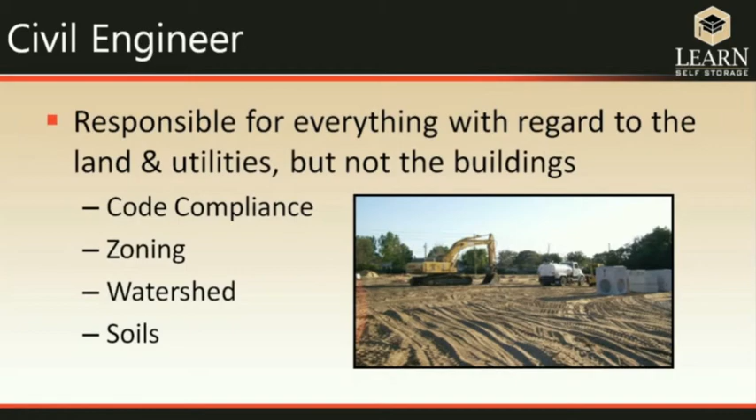The responsibilities of the civil engineer are basically for everything with regard to the land and the utilities, but not the buildings. Once the buildings start, the civil engineer's work is finished. But they are very important in finding out what all of the codes are, what the zoning is, if there are any watershed problems, and what soil problems could be anticipated.

The architect is the person who has the ultimate design responsibility for all disciplines. All of the other people working on the project report to the architect. In addition to coordinating everything, they also draw the site plans, the architecturals, and provide the renderings.

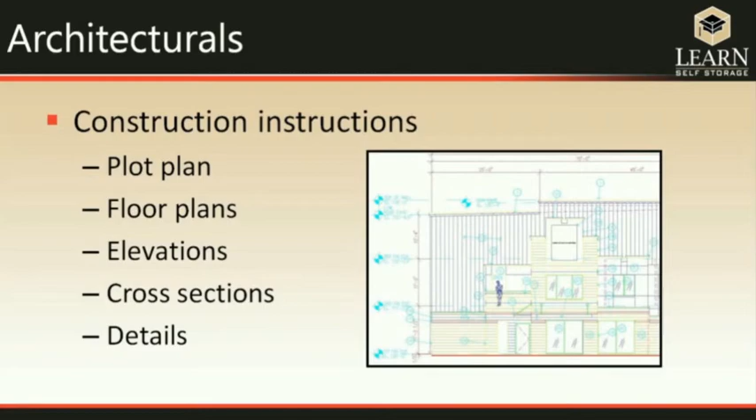The architecturals are actually the instructions for construction, and all of the other disciplines go off the architecturals in designing their own individual portions. This is a cross-section, and this is actually an elevation from one of the design drawings. The plot plans, the floor plans, the elevations, the cross-sections, and the details are the basic footprint for the whole project.

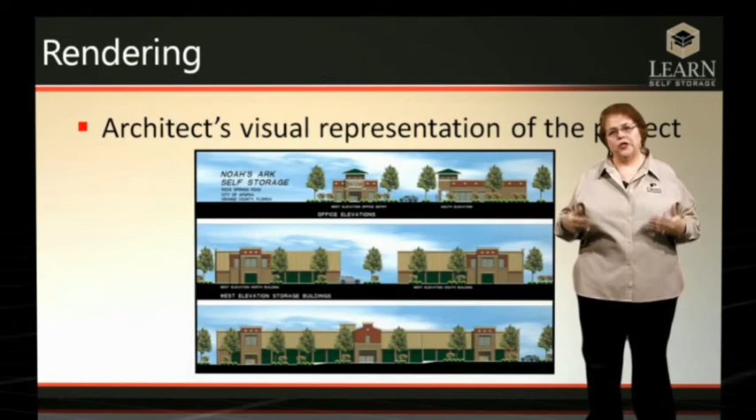This rendering is the architect's visual representation of the project, and this is very important when you are going to a zoning committee or neighborhoods so that you can tell them that the project you are anticipating building in their neighborhood is something that they can be proud of. This is something that the architect provides for you based on the plan that she has designed.

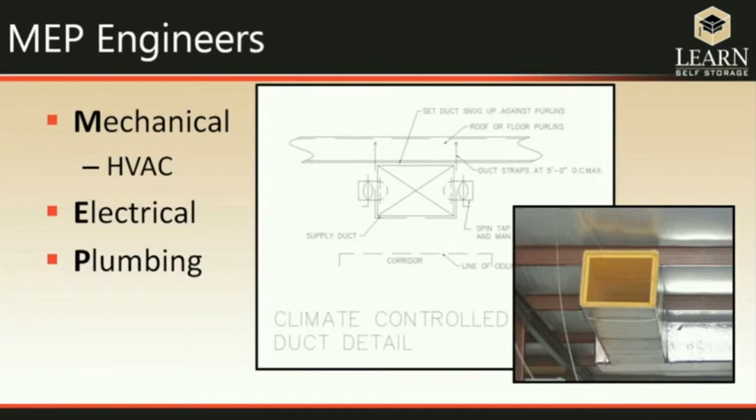The MEP engineers are the mechanical, electrical, and plumbing engineers. Mechanical is your air conditioning, and they provide all of the details for their particular disciplines so that all of the construction can be coordinated. This is a simple drawing of an HVAC duct. As you can see, the mechanical engineer would have designed how the duct is to fit in the building, and then that's the actual application of the design.

The interfaces that have to be taken into consideration in self-storage with HVAC considerations are the space for air handling equipment. Where it's going to be placed has to be part of your metal building design and engineering, along with the units themselves and the ducting. You have to make sure that there's plenty of airflow above the hallways and above the partitions, and how much airflow is needed is dependent upon the HVAC design.

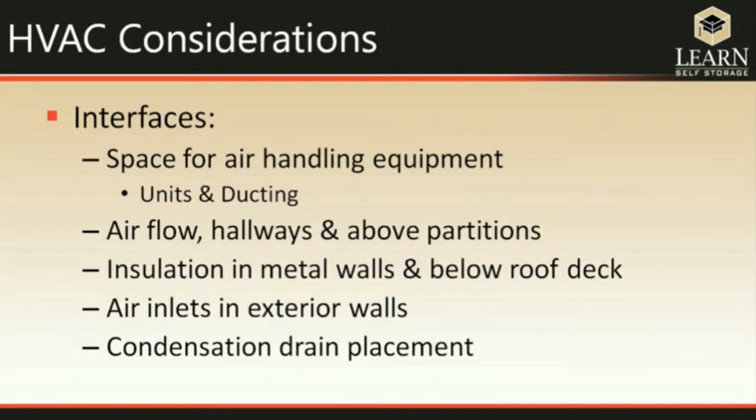The insulation type in walls and below the roof deck is part of the HVAC consideration, and you're going to have air inlets in the exterior walls, and there are going to be condensate drains. These things aren't part of the actual metal building, but you have to be aware of them and take them into consideration when you're actually designing your building.

Electrical items have to be taken into consideration as well. The exterior fixtures, for instance, can't be in the same spot where you're planning to have a downspout placement.

Downspout placements are set at specific intervals in order to handle the water coming off the roof, but we have to coordinate with the electrical to make sure that their fixtures and our downspouts aren't in the same place. There are also considerations for soffit heights and lighting fixtures in the hallways, equipment rooms for electrical or panels, and conduit placement. All of these things from the electrical portion of the drawings can have an effect on the metal building drawings as well.

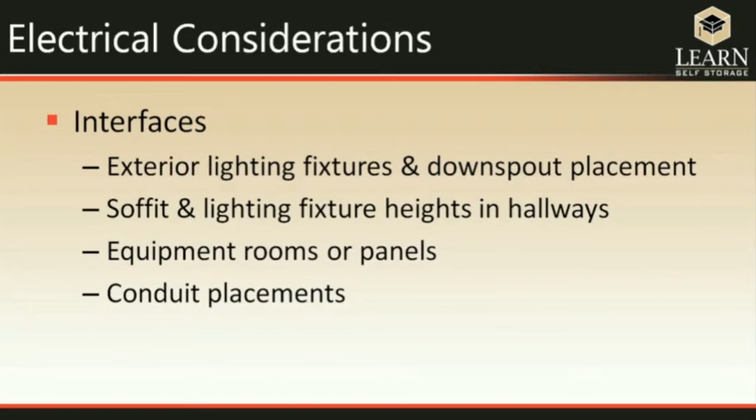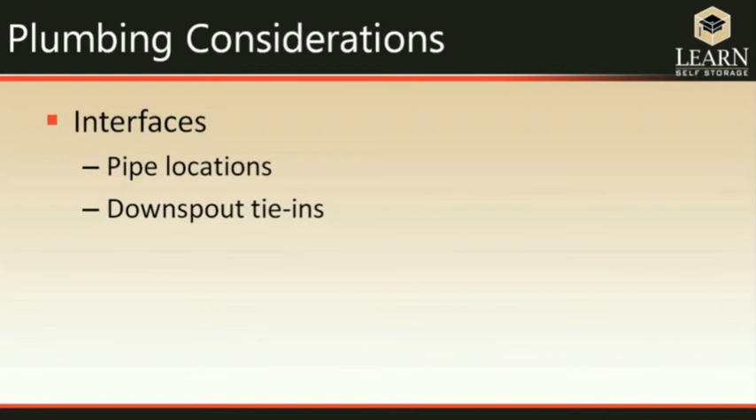Plumbing considerations are very minimal, but you just have to be sure that there are no pipes that are located coming up in the middle of a unit or in the middle of a hallway when you're drawing your building. And sometimes downspouts have to be tied in to underground drainage, which can be handled by the plumbing details as well.

Fire safety is something that comes up all the time in your metal building design. If the building is going to be sprinklered, your partition wall height may be different. They may want to put in mesh, which will also affect your partitions. And partitions oftentimes have to tie into firewalls that are made out of building materials. And there's a coordination of trade efforts that has to take place because you're needing to tie in your walls, which are throughout the building, with other trades.

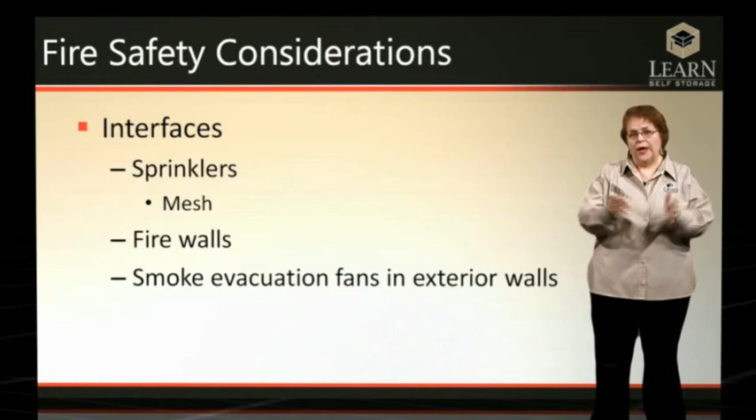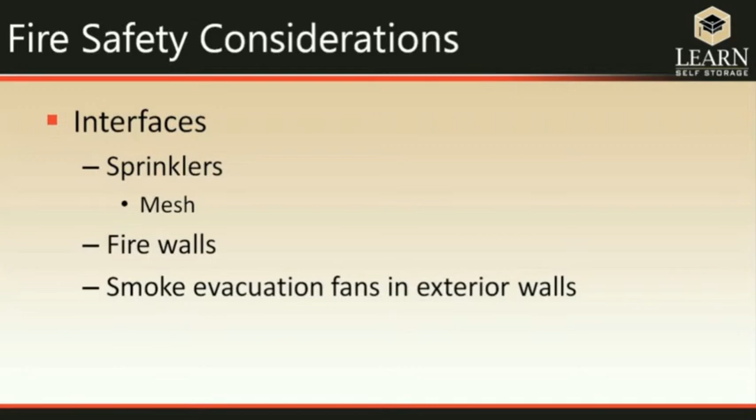So everything has to be designed so that both trades know exactly what they're supposed to do in these different intersections. Oftentimes there are also smoke evacuation fans that are put into the exterior walls, and these are usually placed by the people who are going to be putting in that smoke evacuation system, but the metal building contractor is the person who is going to actually be making those holes most of the time. And these should be detailed on the drawings so everybody can be coordinated with what they're supposed to be doing.

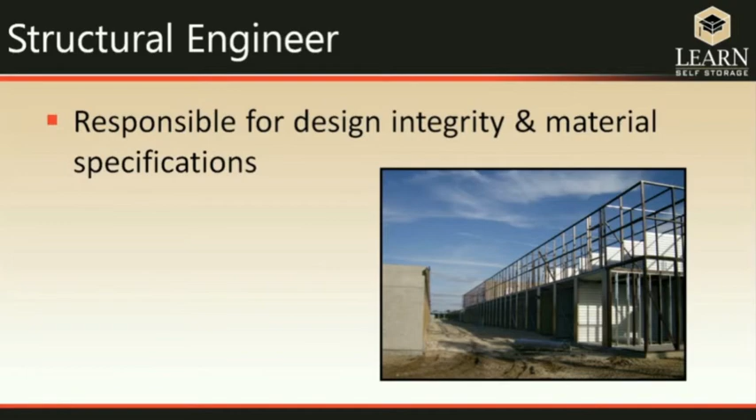The structural engineer is the engineer that we're going to be talking about most today. They are responsible for the design of the building itself and the integrity of the building and the material specifications that are going to provide that integrity.

The most important design factors in structural engineering are loads and stresses. Loads can be dead loads or live loads, and stresses are compression, tension, and shear.

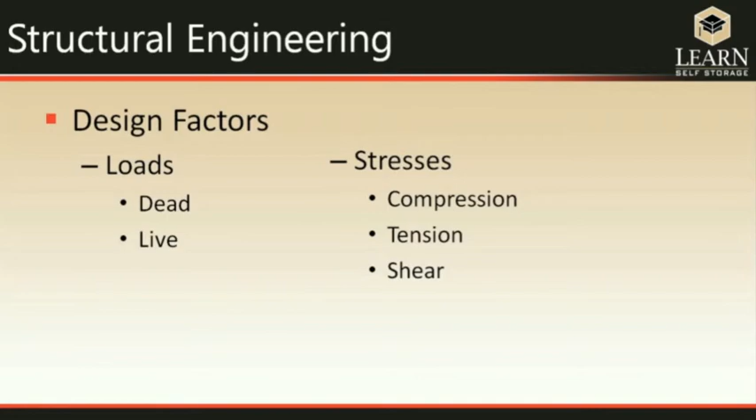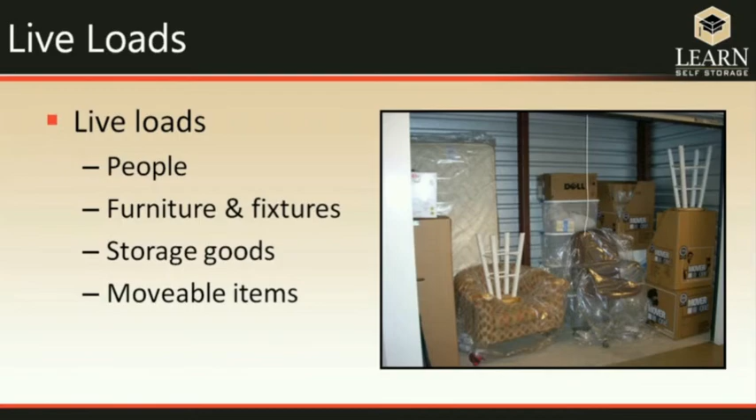Live loads are people, furniture and fixtures, storage goods, movable items. Basically anything that comes into and out of your building that is not attached in some way is part of the live load. Building codes dictate how to cope with loads and stresses. Stresses really are basically a response to the load.

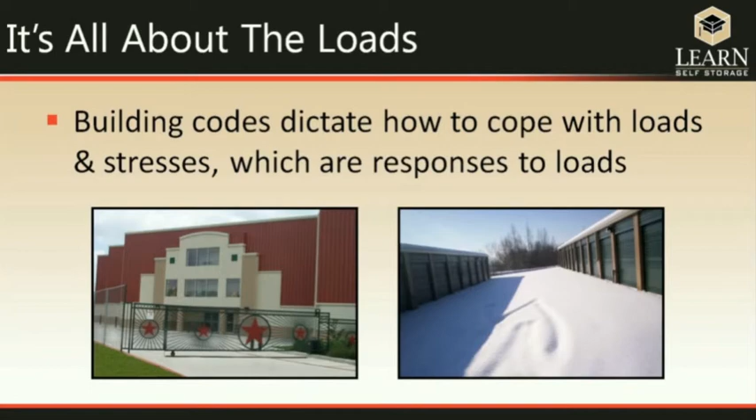The loads that have to be considered in addition to live loads and dead loads are forces of nature. Wind loads, snow loads, rain, earthquake, flood loads, all of these are taken into consideration when the engineer is making their calculations.

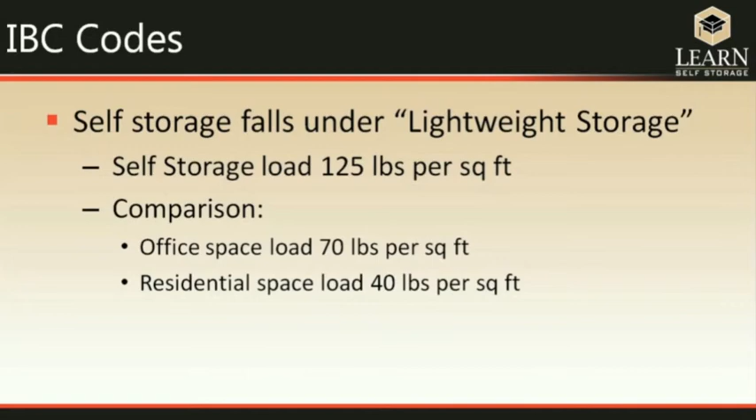Self-storage falls under lightweight storage in the International Building Code, and that means that it has to be able to withstand a load of 125 pounds per square foot. An office space load is only 70 pounds per square foot, and a residential space load is only 40 pounds per square foot. So in the lightweight storage load considerations, they're taking into consideration everything that people might be able to bring into the building and its weight.

The International Building Code is instructions, tables, and maps. And these put together give an estimate of the requirements to withstand loads and stresses in different areas. Building weights, occupants, contents, and resistance to forces of nature are all built into the maps and codes.

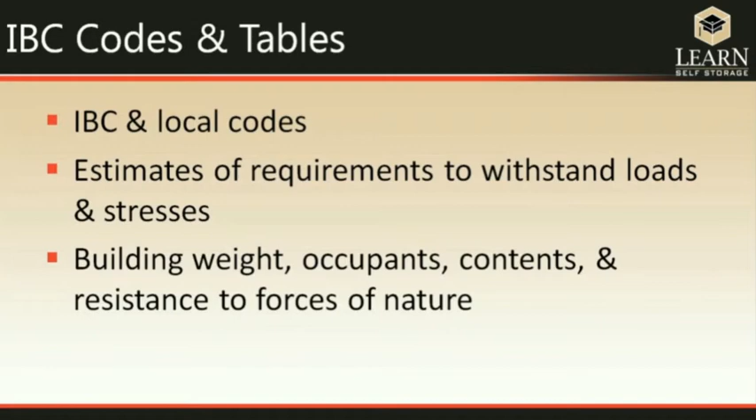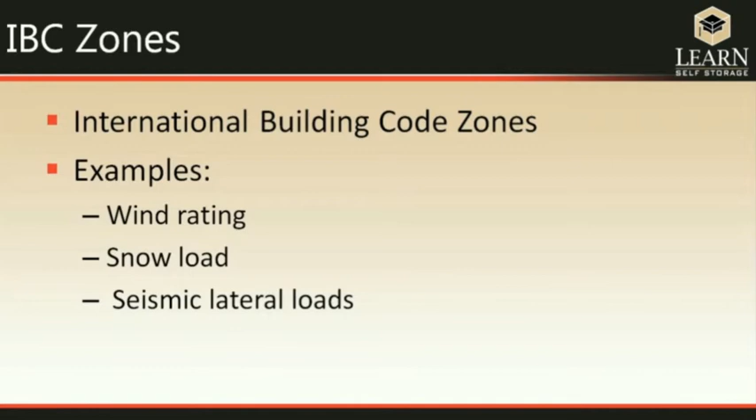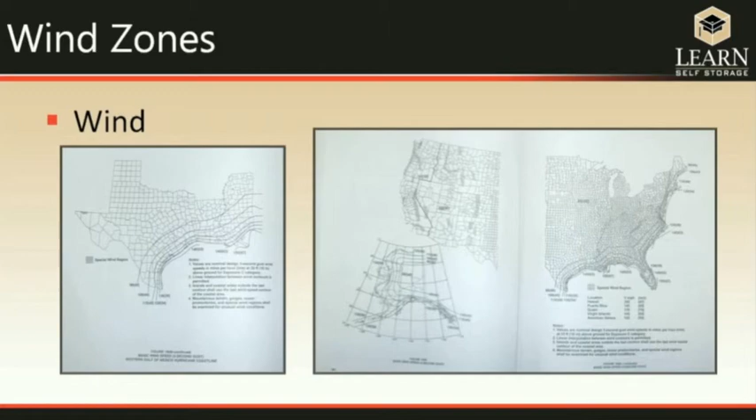The International Building Code publishes zones in the forms of maps. Examples would be wind ratings, snow loads, and seismic lateral loads. This is an example of a wind load map. It shows the entire United States, and then there's a close-up here of Texas because we have hurricane force winds. The IBC goes into great detail in estimating what the anticipated loads would be for any particular area, and the structural engineer has to design his building for what the IBC estimates are the potential loads.

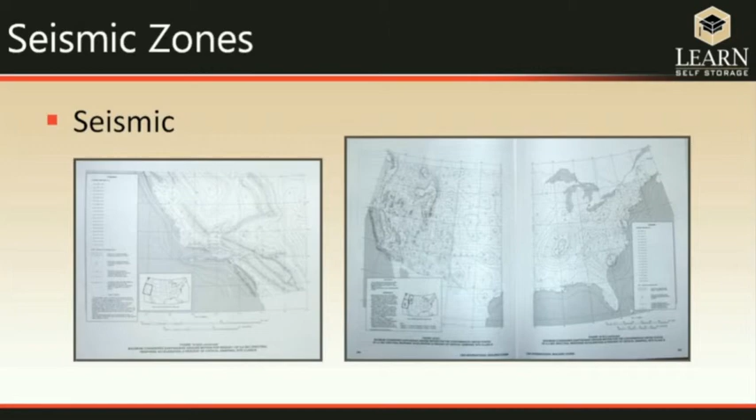Snow loads are mapped out in the same way. Seismic loads are as well. And I put in a close-up of California there because it's a very seismically active area. And you can see the difference between the eastern half of the United States and the western half of the United States. Anything west of the Rockies, there are very detailed seismic zone loads.

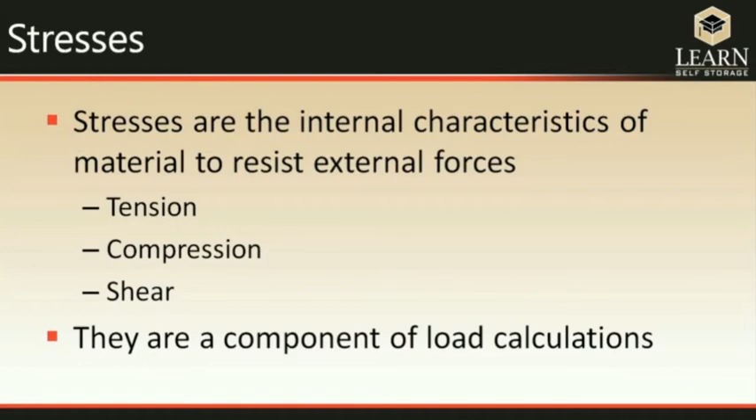Stresses are the internal characteristics of a material to resist external forces. Tension, compression, and shear are the material's resistance to the different loads we've talked about. They are a component of the load calculations.

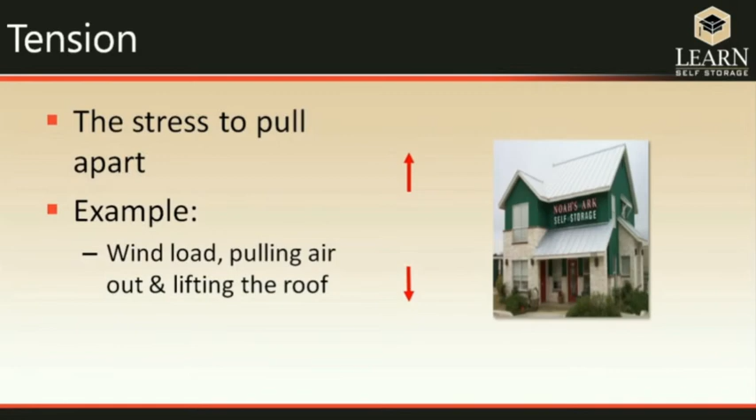Tension is the stress to pull something apart. For example, if you have a severe wind coming toward your building, it's going to be pushing against the building and pulling the roof upward. It's also pulling the air out of the building, lifting upward on the roof. This is the tension to pull something apart.

Compression, on the other hand, is the stress to push things together. The heaviness of the physical weight of the building sagging down upon itself is called compression.

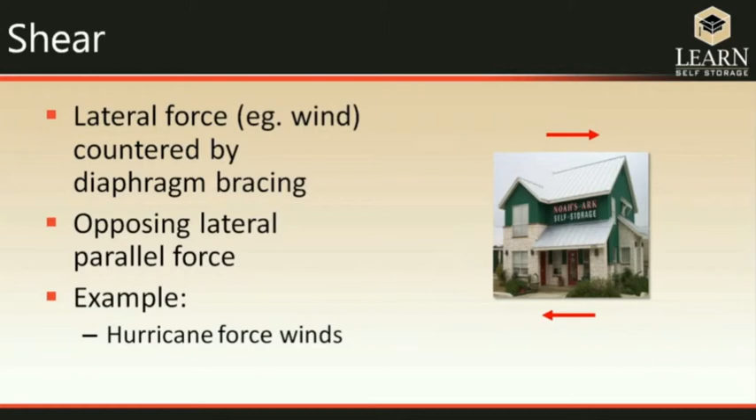Shear is a lateral force caused by wind, and it's countered by the diaphragm bracing of your building. If wind is coming from one side, it's pushing the building in one direction. The opposing parallel force of the building itself is to pull it back into alignment. That is an example of shear and hurricane force winds.

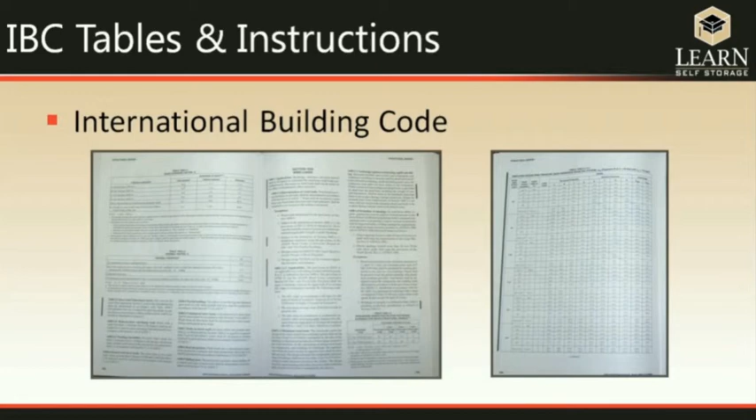The International Building Code describes all of the codes that are required and provides tables for all of the elements that need to be taken into consideration in designing to compensate for the potential loads on your building. When they do that, they design the members, or the pieces of material, that are going to accomplish the requirements needed for the code. One of the things they take into consideration is deflection, which is the amount of sag that a beam has under load.

Sag is determined by the size of the beam and the geometry of the beam.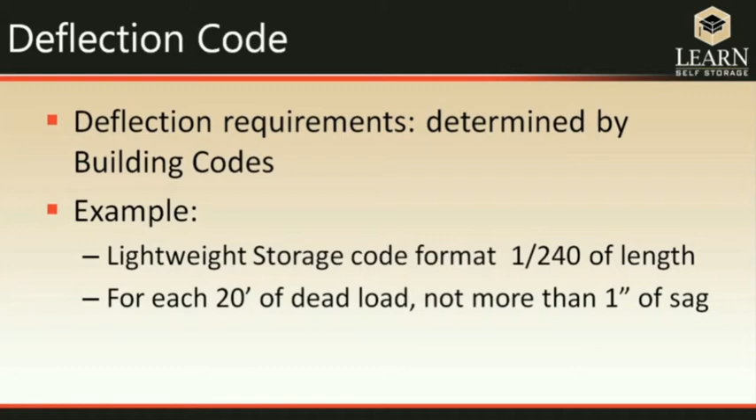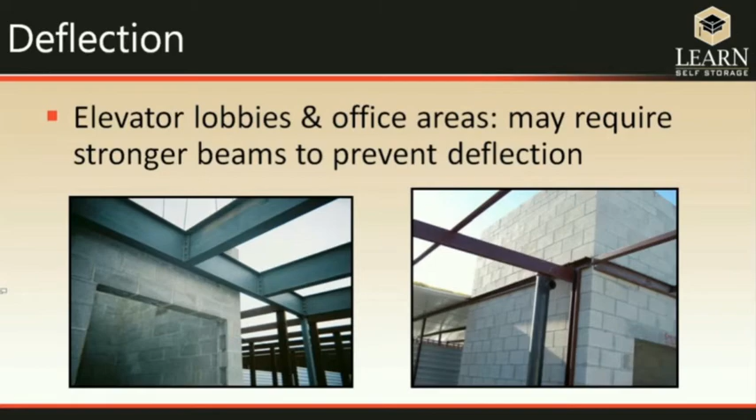Elevator lobbies and office areas that aren't supported on a smaller grid system, where there are longer stretches of open areas, need to have stronger beams to prevent that deflection.

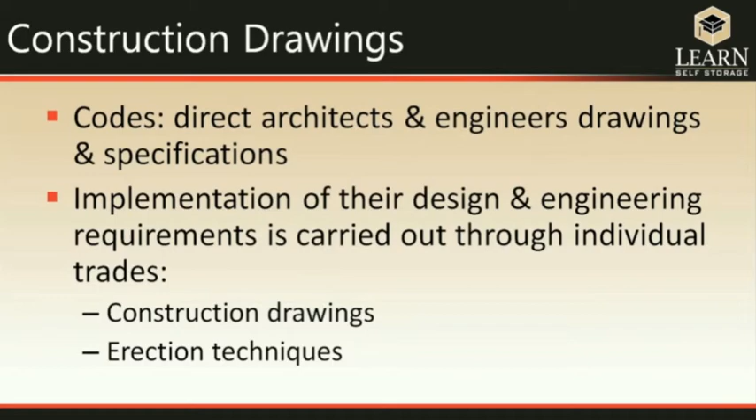When construction drawings are done, the codes have directed the architects' and engineers' drawings and specifications. The implementation of their design and the engineering requirements is carried out through the individual trades. It's the individual trades that do the construction drawings, and their erection techniques have to follow the requirements set out by the architects and engineers as dictated by the codes.

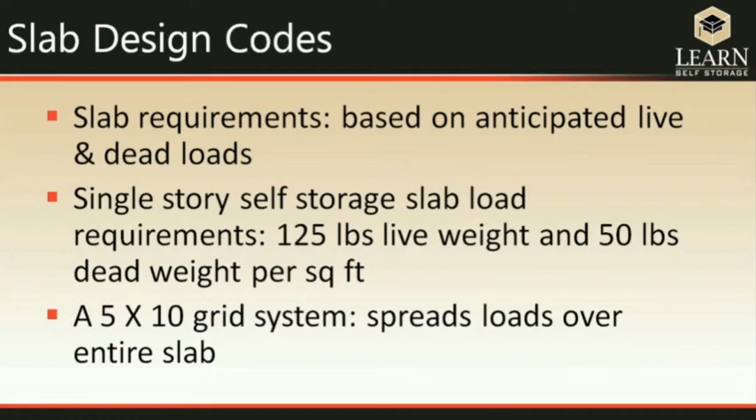Slab requirements are also based on anticipated live and dead loads. A single-story slab load would be 125 pounds live weight and 50 pounds dead weight per square foot. This is important because when self-storage is built, it's built on a 5x10 grid system, and that spreads that load out evenly over the entire slab.

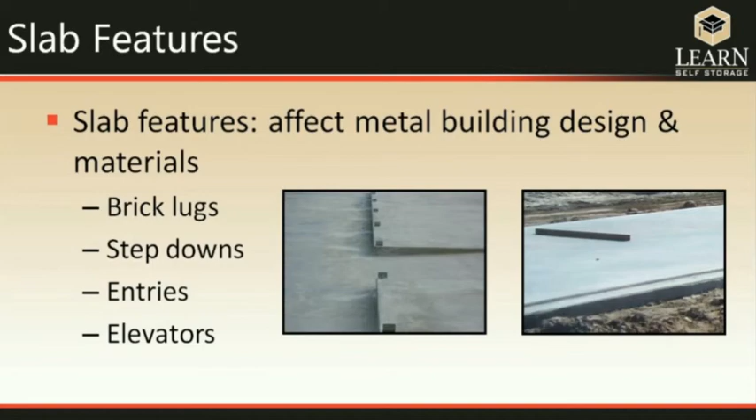The composition of the soil and the topography of the soil also affect the slab design. When you're designing the metal building, the features incorporated into the slab have an effect on your materials. Brick lugs, step downs, entries, elevators — all of these affect the type of material you're going to use and the lengths of materials you're going to order.

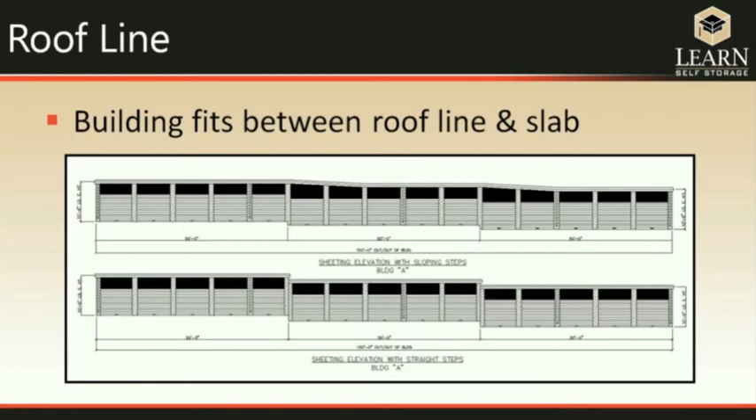The building basically fits between the slab and the roof line. The roof line follows the slab in unison to changes in the topography. This is a step-down roof and a step-down slab, and you build your building between that roof and that slab, and all of the parts and pieces have to be measured to fit within that area.

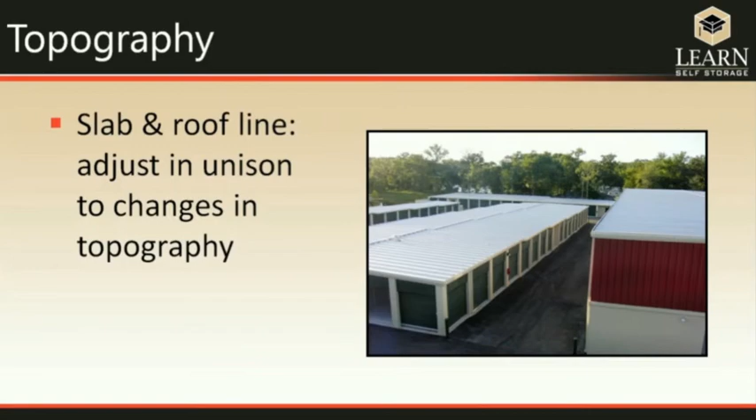Construction metal building materials are selected to meet the code requirements incorporated into the design. There are really two types of materials used in self-storage: pre-engineered materials, and materials that are designed per use. Pre-engineered components have specific designs and specific weights, and you just order them off the shelf like you would Tinker Toys. Designed-per-use materials are like I-beams that are designed for specific spans with specific deflection.

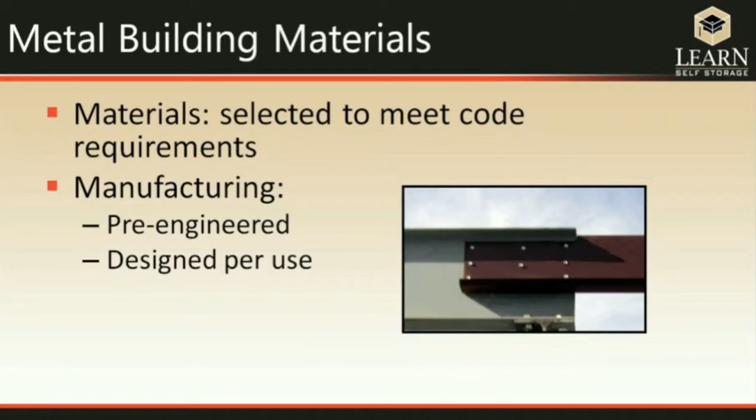It's usually a combination of these that is used in most self-storage projects. Each of the components are rated so that they can be selected to meet the specific code requirements. So when you're picking up one of those Tinker Toys, you know exactly what those properties are and how they're going to fit into the code.

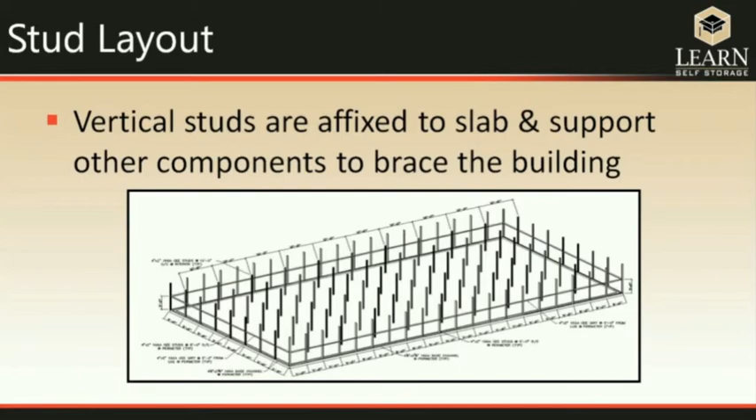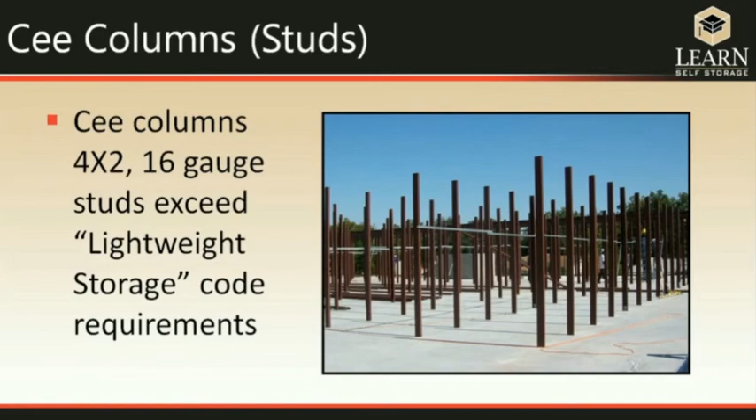When you actually start building your building, we start with vertical studs. They're affixed to the slab, and they support other components to brace the building. This is an example of studs laid out on that 5x10 grid that we mentioned. These are Cee Columns, 4x2, 16 gauge, and they exceed the lightweight storage code requirements.

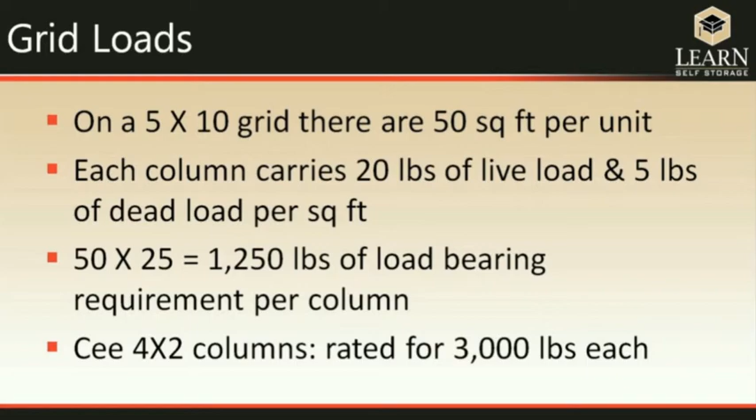On a 5x10 grid, there are 50 square feet per unit. According to code, each column has to carry 20 pounds of live load and 5 pounds of dead load per square foot. That 50 by 25 equals 1,250 pounds of load-bearing capacity required per column. The Cees generally used in self-storage, like the 4x2s in our example, carry 3,000 pounds each, so they are more than double what the code requires.

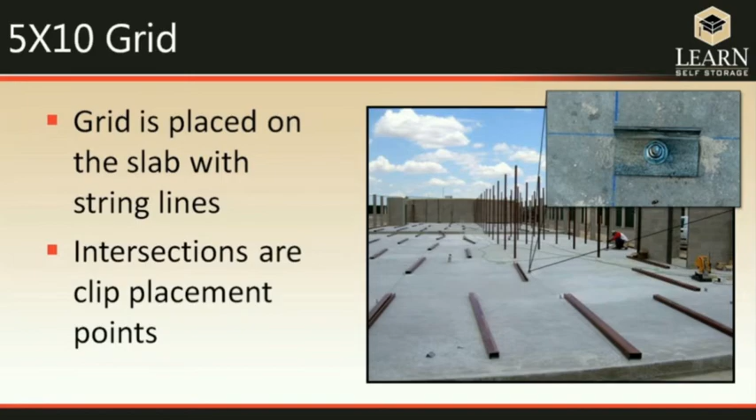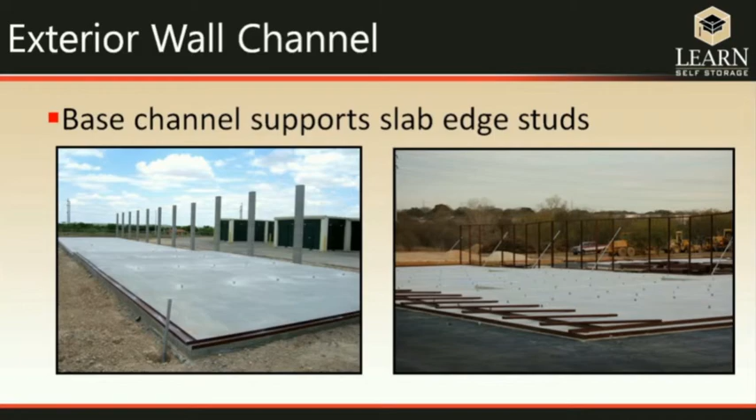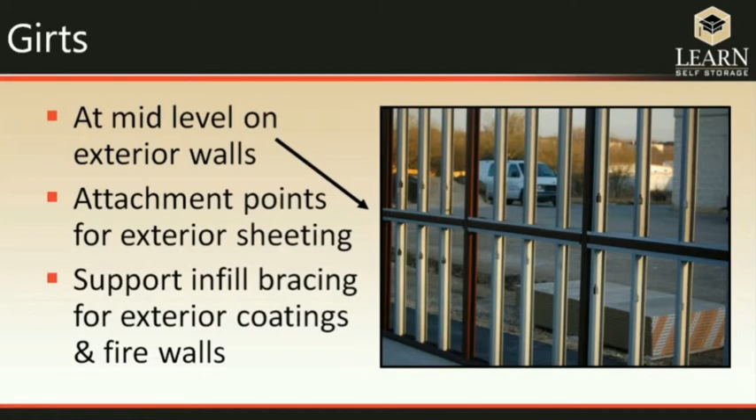Around the exterior of the building, base channels are used to support the studs that go along the outside edges. At mid-level, we also put a girt. A girt is an attachment point for outside sheeting, and it can also be used to support infill bracing if you're going to have some type of exterior coating or firewall. The girts, the exterior channels, and the studs are all part of the framing of the building.

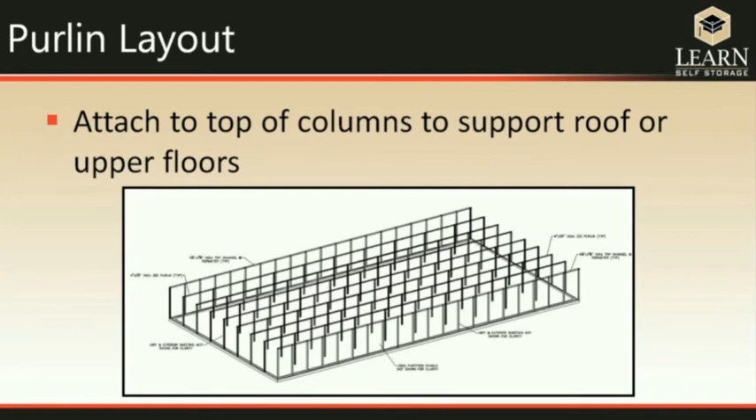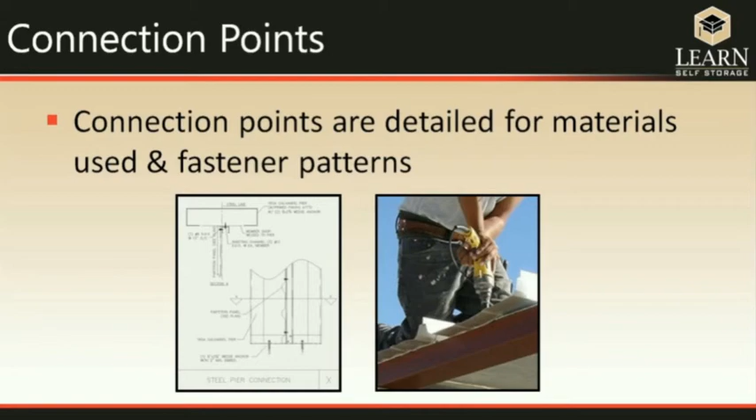On top of the studs, this is where the purlins are attached to support the roof and the upper floors, and the purlins complete the framing part of the building. Purlins run longitudinally the length of the building. Connection points for the purlins to the studs and the types of fasteners used are all part of code and all part of the building plan. Everything is very detailed to make sure that the integrity and strength of the building is consistent.

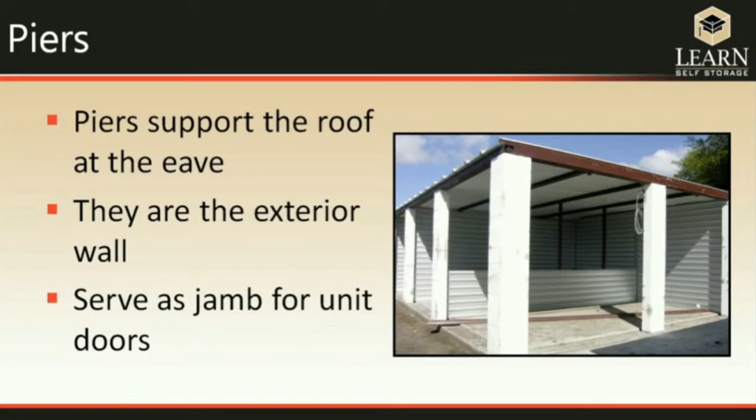There are two types of piers. Piers support the roof at the eaves, and they can also form the exterior wall of the building. They serve as jambs for unit doors as well.

Metal piers attach to slabs with wedge anchors through the pier and into the slab. Masonry columns are built with dowels that go all the way down into the concrete. Both types attach to the eave strut with self-drilling screws. That's how the piers are attached to the eave struts around the exterior of the building.

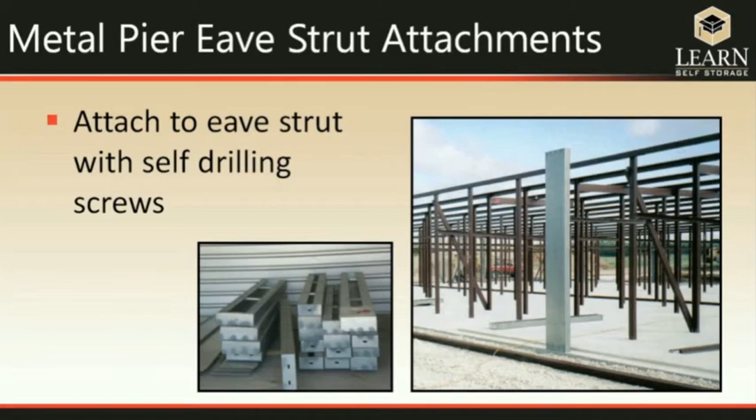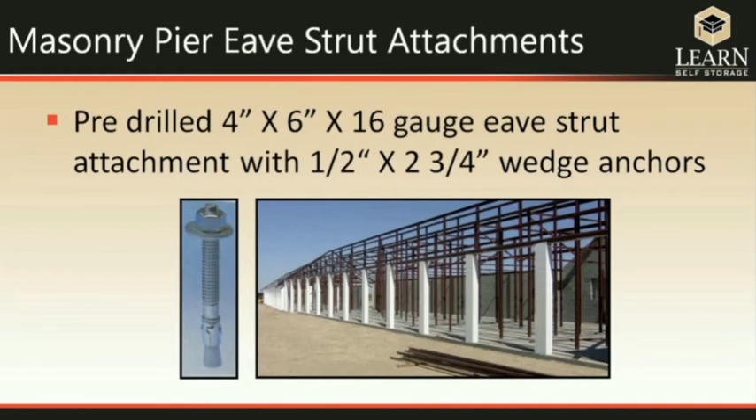Masonry columns are a little more sensitive to breakage, so we use pre-drilled eave struts and wedge anchors when we're attaching the eave struts.

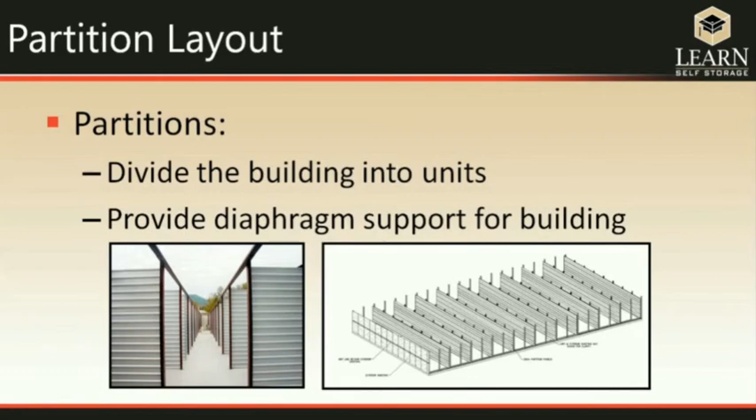Partitions are the next thing incorporated into the building, and partitions can actually go up in conjunction with the framing because partitions provide diaphragm support for the building. Partitions and the roof are the two things that actually give the diaphragm bracing. Insulation provides thermal and moisture barriers.

That's usually integrated into the design. In this example, you can see that we have chosen 5-foot wide insulation rolls that fit directly into the 5-foot grid pattern. The bottom example is the back side of an exterior wall panel that is a rigid insulation with a panel on each side.

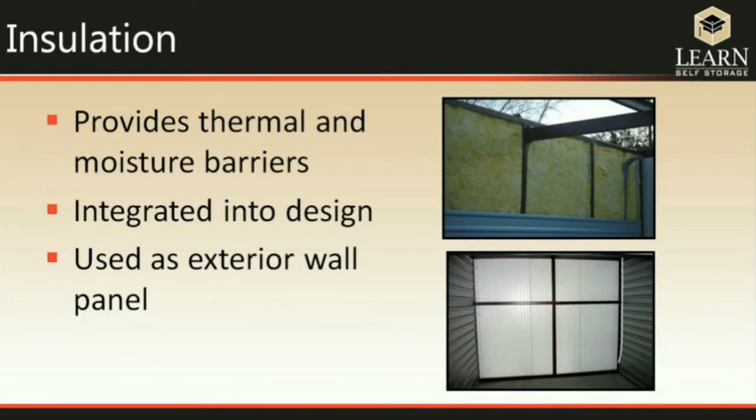There are variations in the types of insulation that you can buy, and there are more variations all the time. Basically, insulation has a facing, which can be a panel facing, foil, vinyl, or polypropylene. Vinyl is only used if it's not going to be seen and not exposed to sunlight. The materials that insulation are made out of are fiberglass, bubble insulation, and rigid foam insulation.

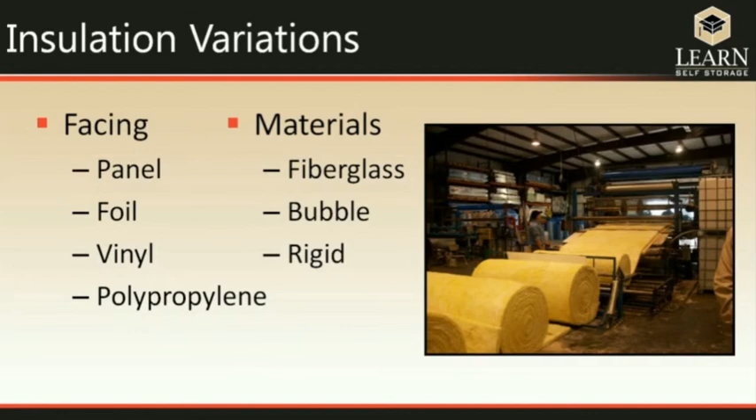Radiant barrier values are part of code requirements, the same as our metal construction pieces are part of code. Insulation selection is based on R-value as well as the cost and the design options you have.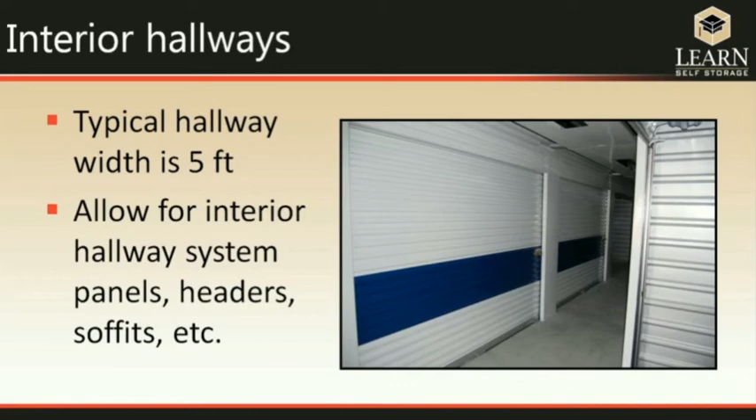On the interior hallways, when the design is being done, they're usually a 5-foot width as a minimum, and you have to allow for the interior hallway system: panels, headers, soffits. All of these little things have to be taken into consideration when you're designing on the 5-foot grid. An inch does make a difference when you're designing in self-storage.

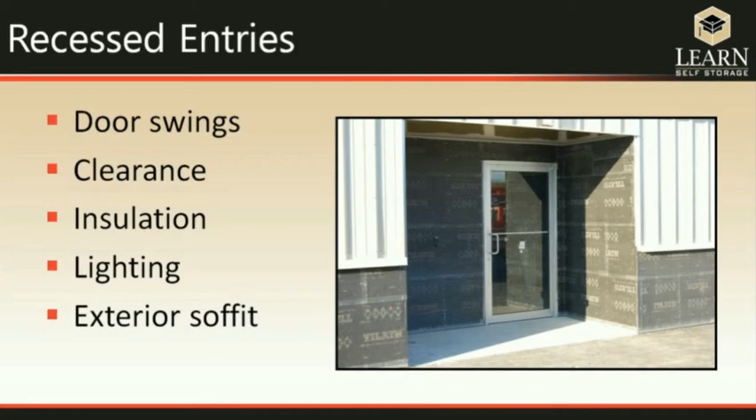For the recessed entries, things you have to take into consideration are door swings, clearance, the type of insulation you're going to use, what type of surface is going to be on the entry, the lighting, and if you're going to have an exterior soffit. Entryway doors and exterior decorations have to be able to withstand the forces of nature as well.

The most significant factor in tension is determination of the roof wind rating. This rating is determined by code, and the gauge of the roof, which is the thickness, increases in proportion to the wind ratings. The number of fasteners used and the type of fasteners have to have a wind resistance capacity equal to the roof.

Roof hatches also have to be wind rated. If a roof hatch blows open, it can suck the air out of the building and lift the roof right off. Roof hatches are very important as a safety measure, but they are a potential problem if they're not installed right and wind rated correctly.

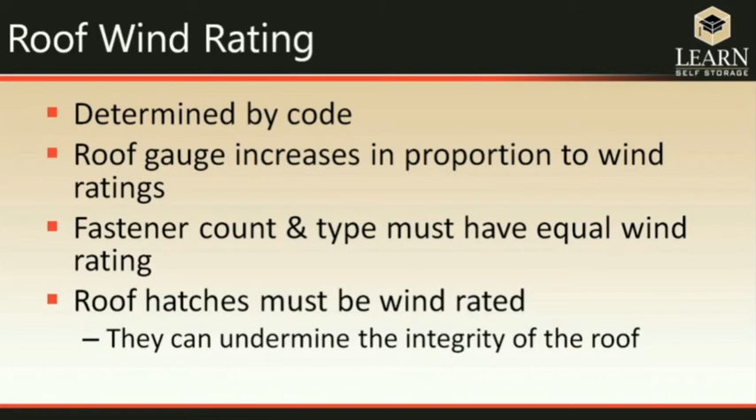A standing seam roof has to have at least a 1/4 inch on 12 pitch in order to shed water. Screw down roofs require at least a 1/2 inch on 12 pitch. What that means is that for every 1 foot of length, it has to rise either a 1/4 inch or a 1/2 inch in order for water to shed off. This picture is a gable roof, and of course that's a much steeper pitch.

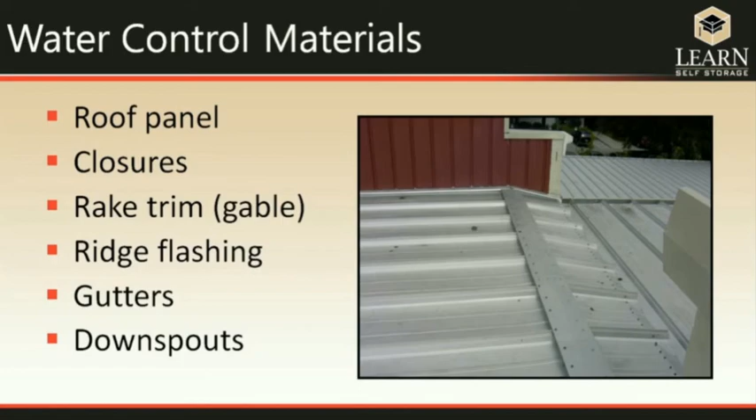Water control is absolutely the most important factor in roofing materials. The roof panel, all of the closures that are used, the rake trim, ridge flashing, gutters, downspouts, all have to be integrated correctly and sealed correctly in order to maintain their integrity to repel water as well as their structural integrity. A positive slope has to be maintained throughout any transition on the roof line.

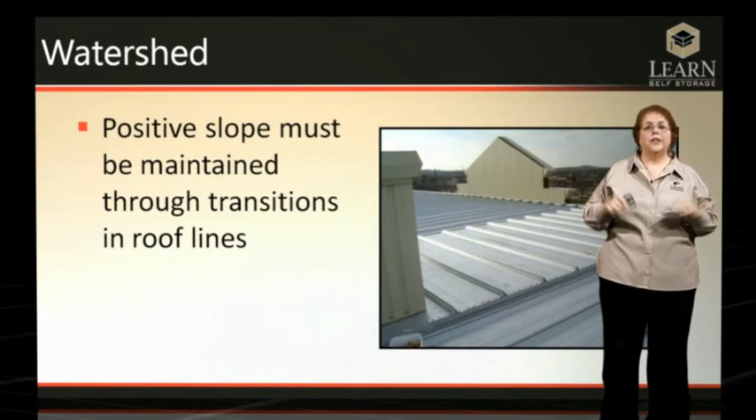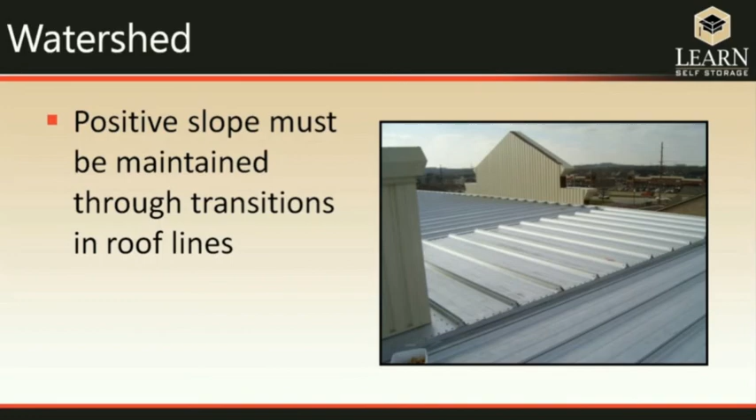If you recall, the roof line follows along in unison with the slab, and sometimes they're at different levels. Any transition that you have from one level to another, to follow topography, or in this case where it's next to an elevator, positive slope for watershed always has to be maintained.

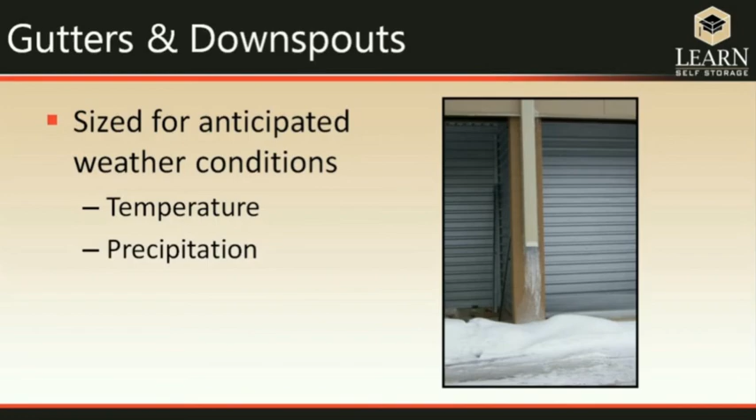Another important consideration is the size and placement of gutters and downspouts. You have to take into consideration those environmental factors, temperature and precipitation amounts, when you're determining gutters and downspouts.

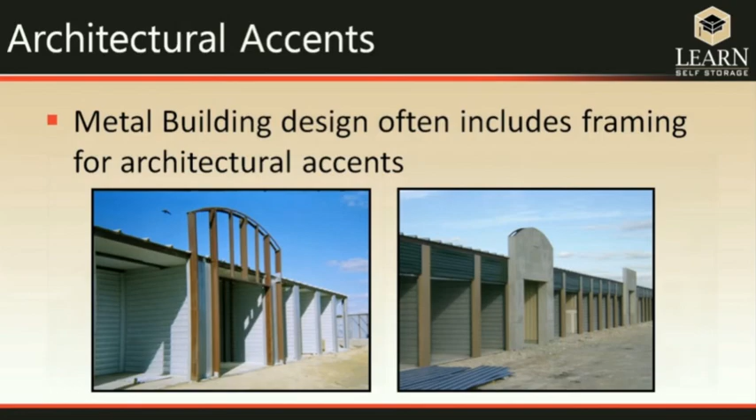Another factor of metal building design and engineering is architectural accents. Often accents are made with other materials, but they are framed with metal framing. Accents can basically be done one of two ways: they can be integrated into the building itself, or they can sit as an envelope on the outside of the building. In this case, the frame is sitting on top of the roof, whereas in the previous case, the accent was integrated into the actual building itself.

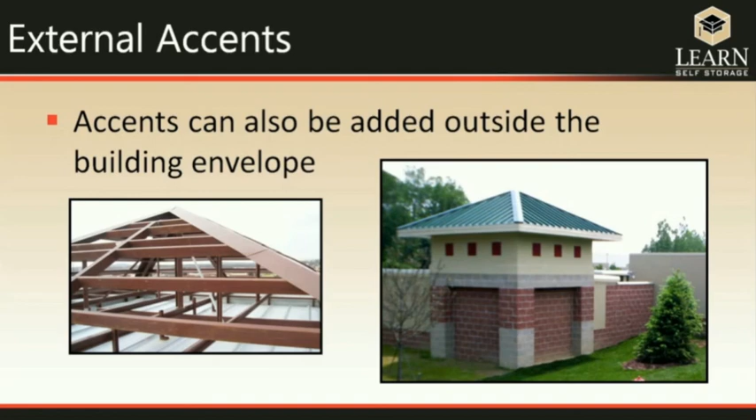In this case, it's added on outside the envelope. The framing for this roof is actually on top of the structural roof. Accent and designed materials have to meet code standards. Thoughtful metal building integration with all of the different types of external coatings that can be applied is essential to having an attractive, weather-tight product.

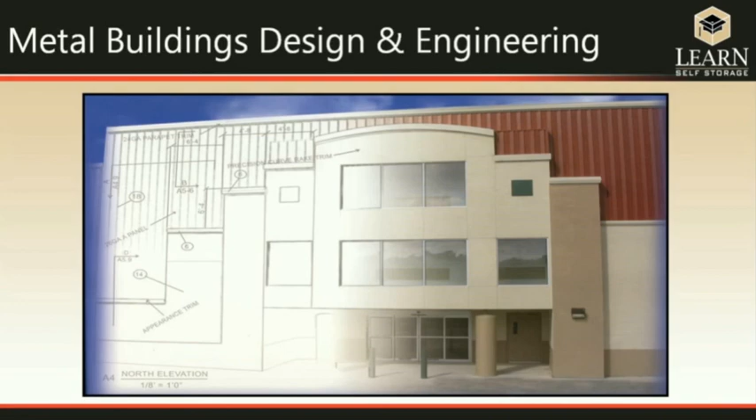Metal building design and engineering incorporates all of these codes to assure personal safety for everyone that is using the building, and long-time structural integrity to maintain the value of your product.